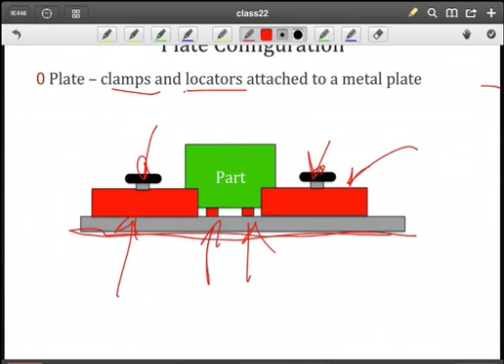First, there's the common plate configuration, where we have a supporting plate attached to a machine table, and we build up the fixture from that plate. We've got a set of clamps and locators. Here we see locators used to locate specific surfaces, and clamping devices that attach those to the plate as well as provide a clamping force. This is a quite common configuration because it's easily changed and reconfigured.

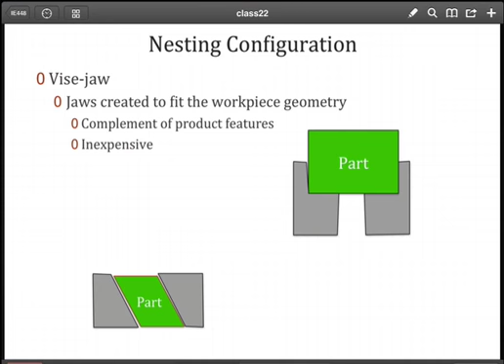Nesting configuration is also quite common, usually seen in the context of a vise jaw configuration. Here the jaws are created custom for the workpiece. We create the complement of the geometry we are nesting, and we don't have to enclose the entire geometry. So we have both locating surfaces as well as a clamping force applied in both cases, and it's fairly inexpensive, which is why it's quite popular and very flexible for creating new sets of jaws for different part geometries.

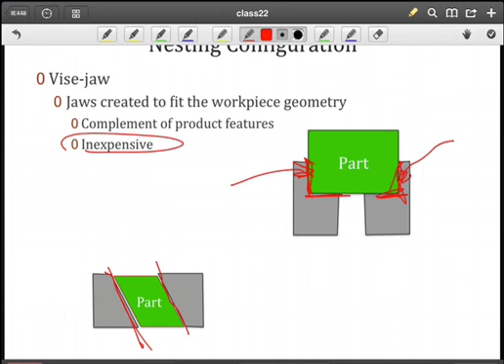If you've been in the lab for 448, you recognize the chick jaw configuration, where we have two positions and a different set of jaws in each position. Again, these are nesting configurations, and we can use both of them, placing parts in different stages in each location, ending up with the proper surfaces being located.

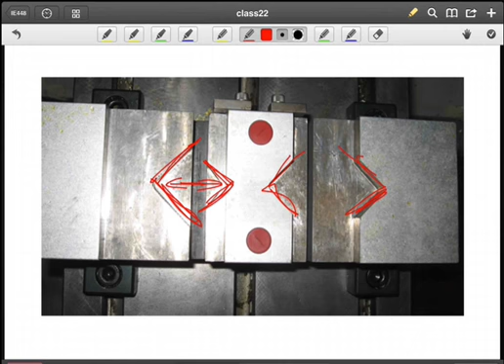If we look at that from the top, we see different possibilities for nesting. Here's the V-block we talked about last time, with different sizes and different depths. If we had a cylindrical feature, we could use the V's here to locate that axis. Don't forget about the process direction and the potential for deviation in terms of how far we are from that vertex. We also have locating surfaces here, here, and here.

Usually you have this two-position configuration when you want to have different widths to accommodate different sizes of parts and different nesting geometries that you need to enclose surfaces.

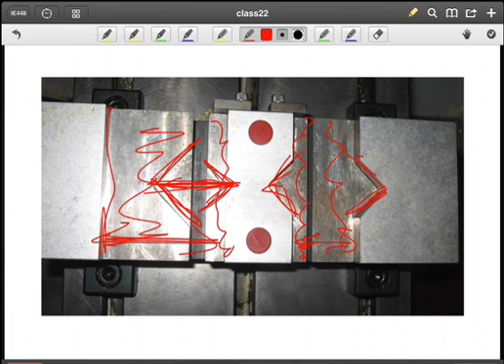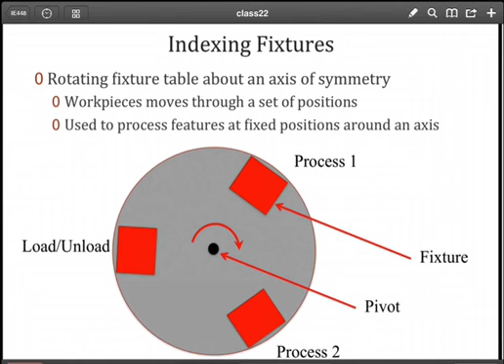An indexing fixture is quite common. Here we see three fixtures, all exactly alike, placed on an indexing table that rotates. I have a load-unload station where the part is placed in the fixture, so this is where my setup occurs. Then we rotate to the next position where a process is performed, and rotate again to the next position. So essentially we have a part on each of the fixtures going through the set of processes.

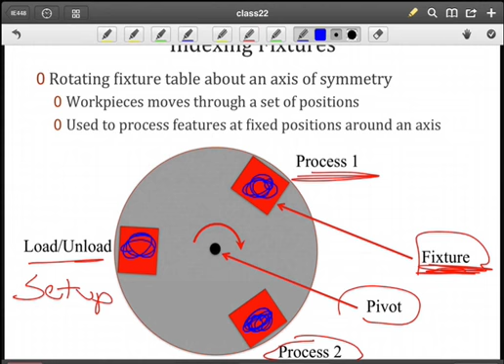Now you can see the advantage of this, and it has to do with cycle time. The lead time is not affected because the part still has to be set up, go through process 1, go through process 2, and then be removed from the fixture. So the total lead time to go through all these processes is still the same. The nice thing is we share a setup between process 1 and process 2, so we only have to set up once. This reduces the setup time, which is the goal: to minimize setup.

The cycle time will be affected by the bottleneck, the longest cycle time. So instead of performing process 1 and 2 together, we've split them, reducing the cycle time. The downside is it requires 3 fixtures, so the tooling cost has gone up. But we've seen improvements in cycle time and setup time, so there's a trade-off. The question is whether it's worth the trade-off.

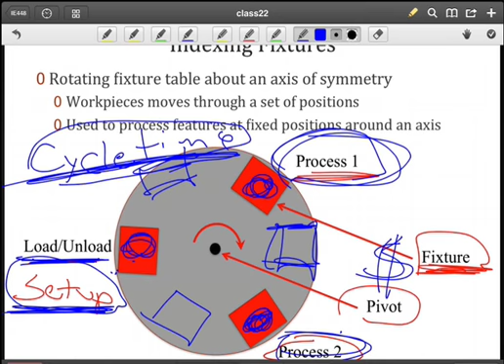Of course, you can have as many positions as physically possible on this indexing table, so if we wanted additional stations, we might have to increase the size of the indexing table. We can also use a multi-workpiece fixture configuration.

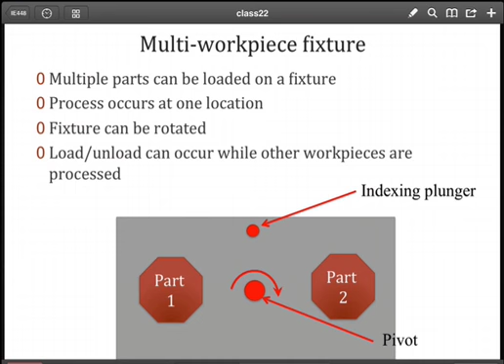At first glance it might look similar. The difference is that we're only going to have one process, and here we have two parts. We rotate a part into the process, and the cycle time occurs, so that one part location is essentially your setup and unload station, while the other location is where the actual process is taking place.

The indexing plunger is used to lock it in place, so we rotate it into the process, then rotate it out. What is the advantage of this type of fixture configuration? As you can see, we're doing the setup and unload at the same time that we're doing the process on that particular part, and therefore the impact is on cycle time.

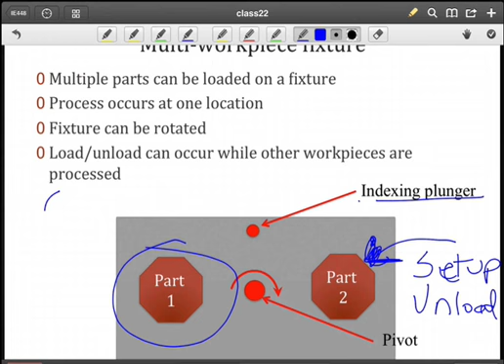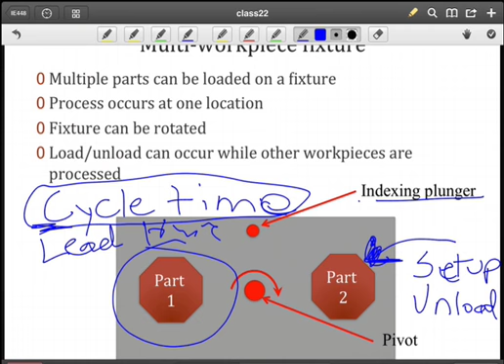Note that we haven't reduced setup time as in the previous configuration. We still have the same lead time to get through the process because we still have to go through the setup and unload as well as the process itself. So the advantage here is on cycle time. If you need to reduce your cycle time, this would be one alternative to consider.

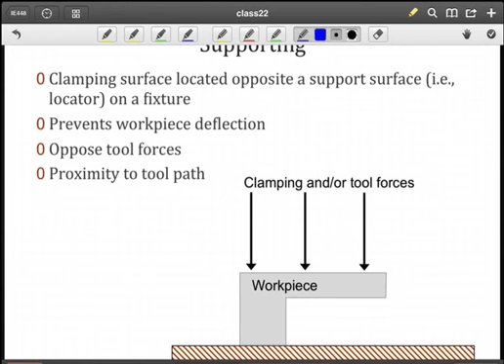When we think of a specific fixture configuration and the clamping forces or tooling forces involved, we have to consider supports. In any of these fixture configurations, if I've got a workpiece, for instance, this one is fairly obvious. If we apply a force out here, you're going to create a moment, and that workpiece is going to want to rotate about a point here and go into the plate.

So what we need here are supports that will prevent deflection of the workpiece, so that if forces are being applied in this region, we can still maintain the location and orientation of the workpiece with respect to the process. This includes both clamping and tool forces. So you have to think about your tool path - where's the tool going to travel, what types of forces are being applied, and where do we need to support the workpiece so that deflections do not occur.

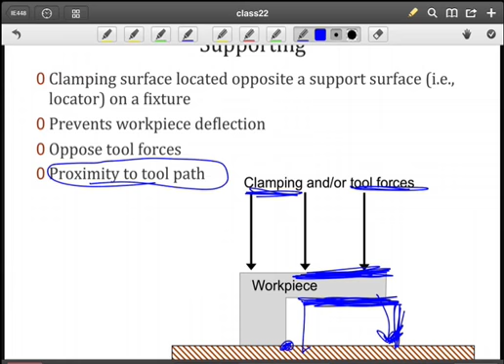When we go back to our datums and datum targets, if you recall, it's often the case that the datum targets are used to identify fixturing points, locating points, as well as tooling points. So we can use those points to actually design our fixtures, and it's particularly important when we're dealing with weldments, forgings, and castings, which often go through a secondary process in order to achieve the final geometry.

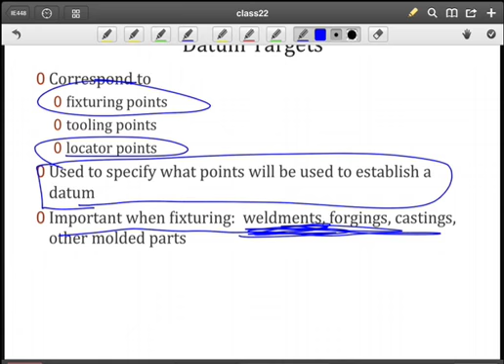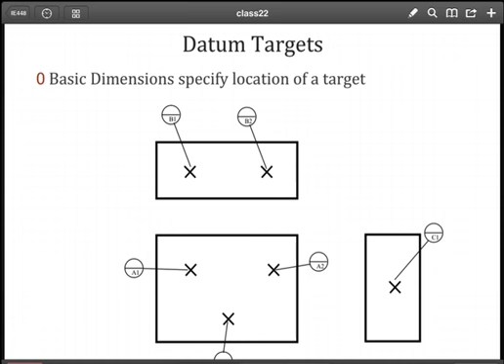So if you recall, we identified on the design spec specific locations. In this case, we have points on different surfaces of the part, and those are used to create our datum reference frame.

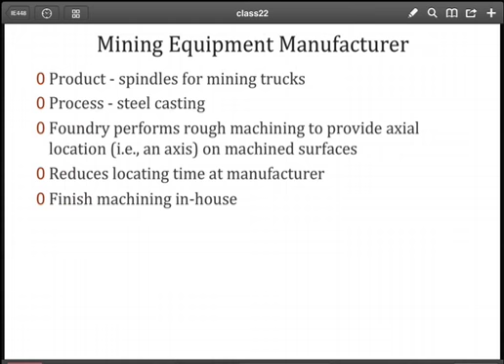Well, what does that look like on an actual part? Here we have an example of spindles that are created through a steel casting process for mining trucks. So we've got our wheel spindles, and the foundry, after producing the casting, is going to perform this rough machining operation, this secondary operation, to provide an axial location, essentially to be able to locate the axis on a machined surface. This helps to reduce locating time when it goes to the manufacturer that the foundry is supplying. And then there's some finishing machining that is performed in-house at the manufacturer.

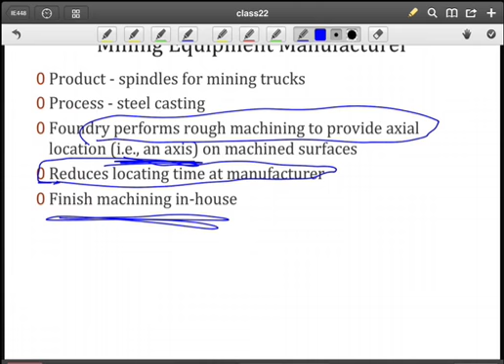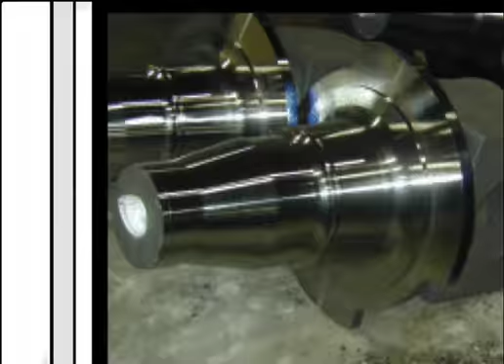Here's an example of what it looks like after the rough machining. You can note the axis that is trying to be created here. The axis is running down in this direction, and the entire casting has to be machined in order to provide that type of locating system.

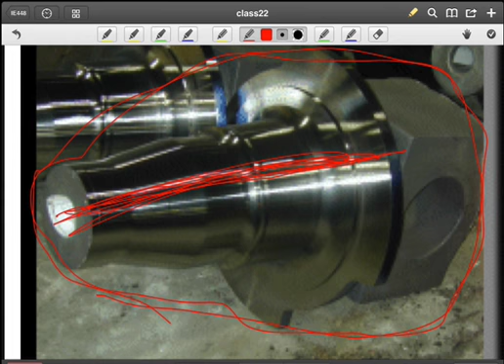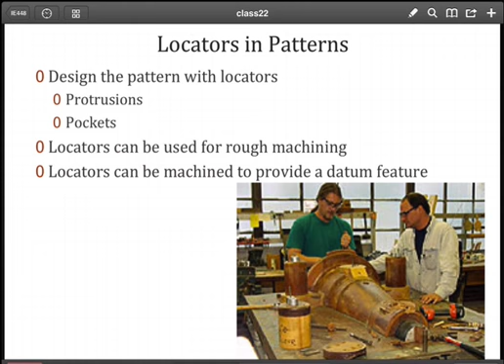When you look at locators, especially for castings, it's often the case that you can design the pattern, as you can see here, in a pattern shop that's being created to produce the mold. So here we have half of the mold, or the pattern used to create the mold. And in that we can add protrusions as well as pockets that are going to allow us to provide some type of location, because when our casting comes out of the mold, it will need to be located with respect to our machine in order to perform the rough machining.

We can also create locators actually on the surface by creating a datum feature with that rough machining.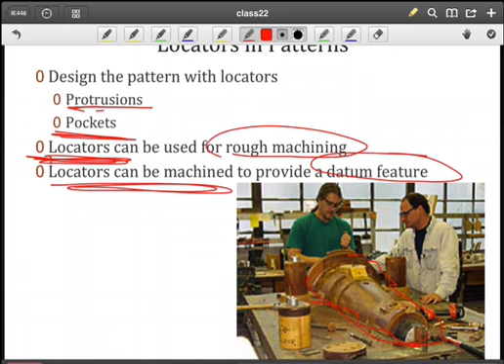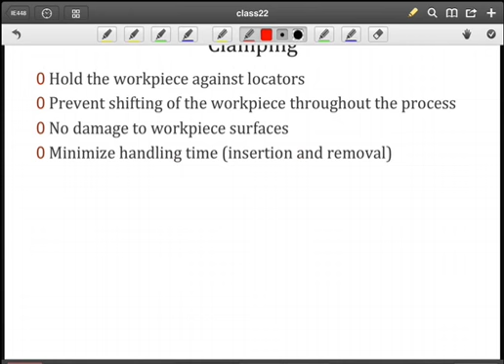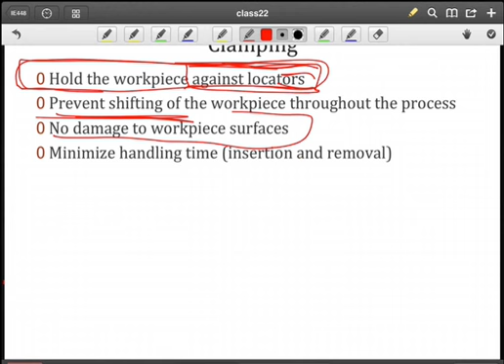The purpose of clamping is to hold the workpiece against the locators. That is the primary purpose. So when you think of clamping, we're not just concerned about keeping the workpiece from moving, but we're also concerned about it lifting or repositioning with respect to those locators. So we want to maintain the position and orientation with respect to these locators, prevent the shifting of the workpiece, and at the same time consider the material the workpiece is made from, because that's going to affect the amount of clamping force that can be applied.

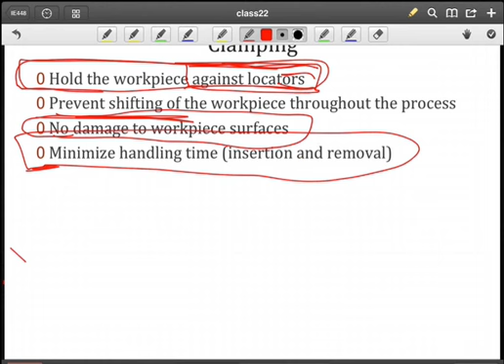At the same time, you need to minimize handling time for load and unload, because that's part of your setup and it's non-value adding. So if you have lots of clamps, it can increase the setup time significantly.

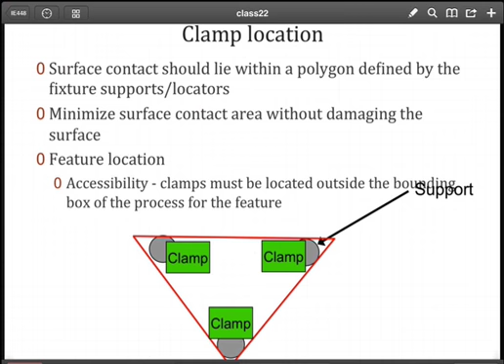When you add a clamp, you have to be concerned about its location. Think about the supports on your fixture—for instance, here we have locators, 3 locating pins. When thinking about clamping into the slide, we want to draw a polygon, the smallest polygon around our locators, and then place our clamps in that region. So it makes sense to put a clamp either in this location, or this location.

Now you may need multiple clamps depending upon what the forces are. But ideally, if you can get away with just one clamp, then you're going to decrease your setup time.

You want to minimize the surface contact area, and the reason for that is tool accessibility to the features you're trying to create. But at the same time, if you minimize surface contact area in order to increase the pressure, you're going to have to increase the force, and you have the potential for damaging the surface—by damaging, we mean plastic deformation.

Don't forget accessibility. You don't want to be placing clamps in the region where the process occurs.

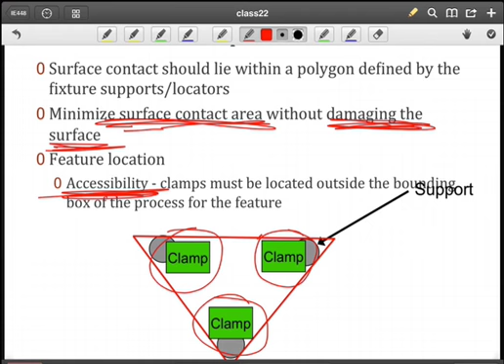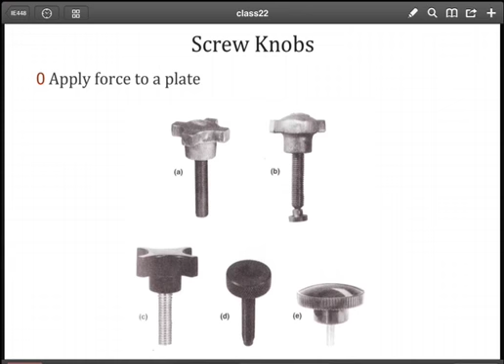These are typical knobs used in clamping, where we apply force to a plate, and in the process of applying that force, we are clamping against locators. Again, as you can see, these are threaded knobs, so there's going to have to be a corresponding threaded hole in order to get the clamping force.

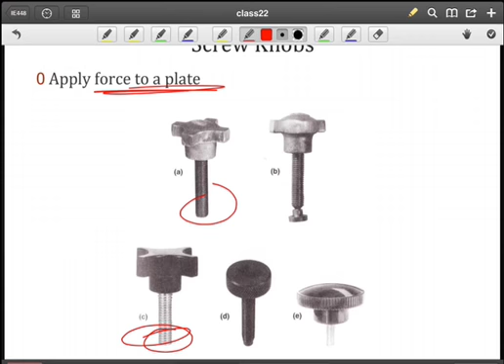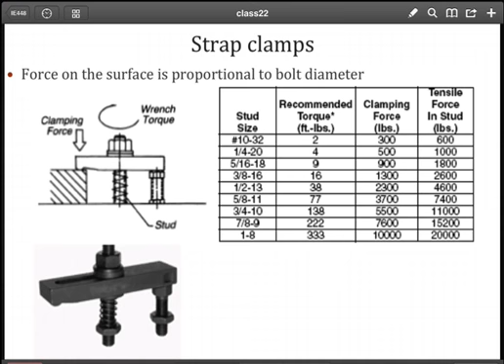A strap clamp is a very common configuration because it helps minimize the surface area that we're contacting, and it's based on the lever principle, as you can see. What we're going to do with a strap clamp is have a small surface region on the edge of the part, and at the nose of the strap we come in contact with the surface.

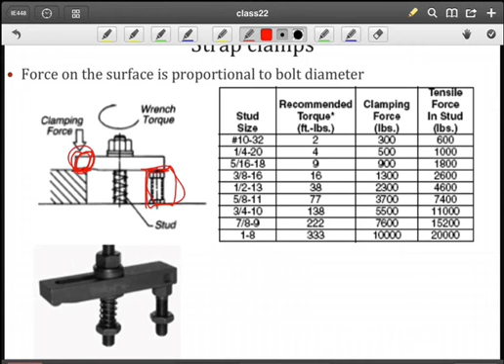Then we have a pivot here, which is essentially an offset from the plate, and we place our strap across that. We have a stud that's threaded into the plate, and a corresponding nut that we tighten on that stud. We tighten it using a torque wrench so that we can have a consistent clamping force based upon the torque and the size of the thread.

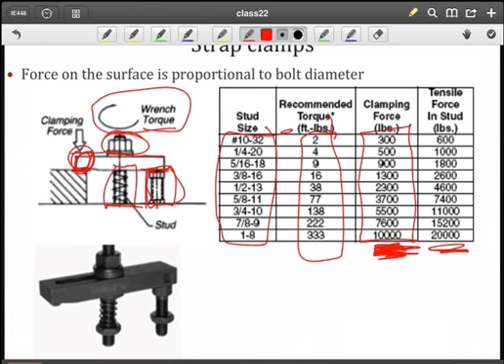We can adjust our clamping force, and these are just examples of the amount of clamping force that we can attain—as you can see, it can be quite significant. Again, here you would be concerned about deformation of your workpiece and potentially deformation of the stud itself, because that would affect your fixture.

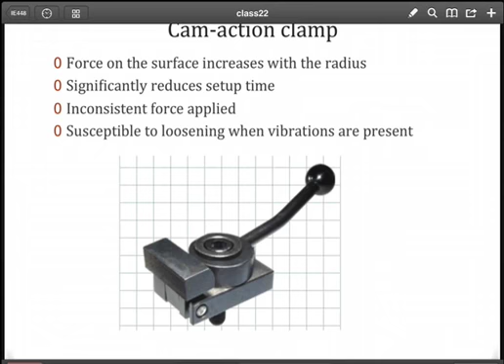A cam action clamp is very nice for quick setups. As you can see, the arm here can be rotated such that we can easily tighten and release our clamping surface. Again, you're clamping against locators.

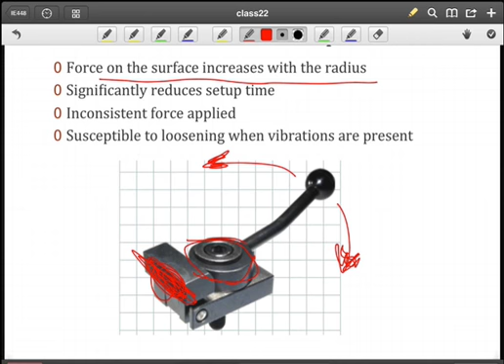The force on the surface will increase as this cam—and hopefully you've seen the geometry of a cam, it's essentially an oval egg shape—rotates so that the radius is constantly changing. As it gets larger with respect to this surface, we're moving further, and therefore our clamping force is going to increase.

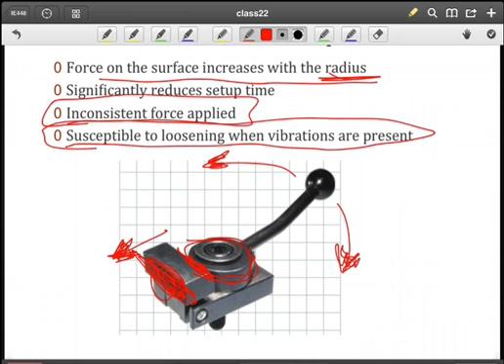The problem here is that you're going to get an inconsistent force applied by the operator. Each operator and each workpiece will see a slightly different force applied. It can also be susceptible to loosening if significant vibrations are present in the process. So again, you're faced with trade-offs between decreasing setup time and having a consistent force applied.

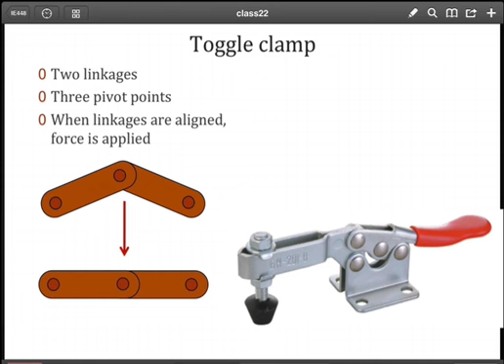Another common type of clamp configuration uses two linkages, with a pivot point, as you can see here. That pivot is going to lengthen the overall dimension, which provides the clamping force. When the linkages are aligned, the force is applied. The direction, of course, changes depending upon the actual configuration, and there are many different configurations for these toggle clamps.

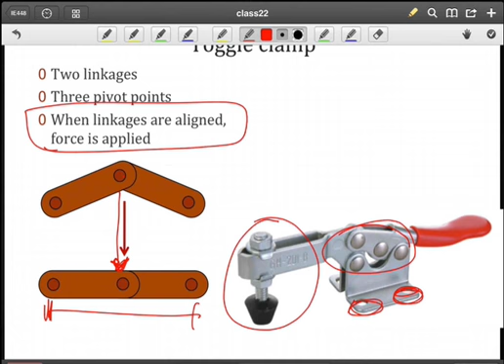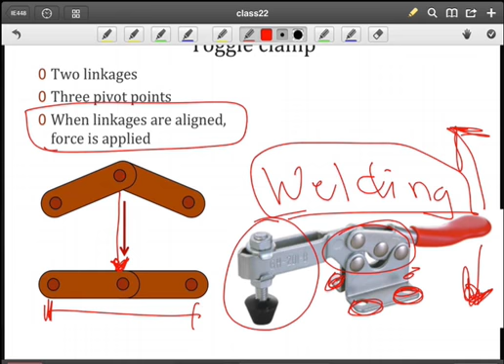We would attach our clamp to our fixture and then apply force to the lever to get the toggling effect. As you can see with a toggle clamp, typically they are low force applications. You'll find these quite often used in welding, where we have weldments—we could have a lot of toggle clamps trying to hold our workpiece up against locators.

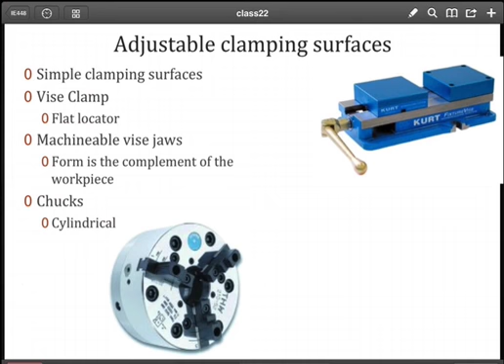And then we have our adjustable clamping surfaces that we talked about for the nesting configurations. Here we're going to have a vise clamp with flat locators or V-blocks machined into those surfaces. And with the nesting configuration, we can create custom surfaces that we're clamping against. And all we do here is essentially rotate until we come in contact with our surface and hold it against our locating surface. Note that the only force in this direction, normal to the axis here, is a frictional force.

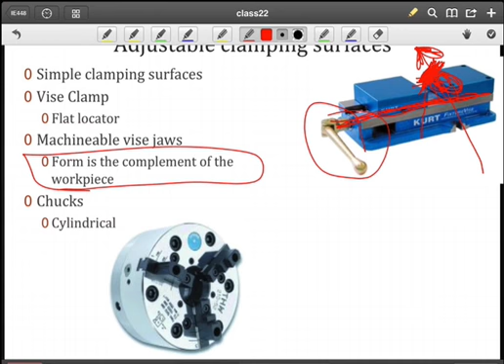And if you recall from a frictional force, that is not the best way to overcome a tooling force. Also note, your workpiece can pop up because, again, in this direction, in the Z direction, we also just have a frictional force. So there is a downside of using this type of an approach.

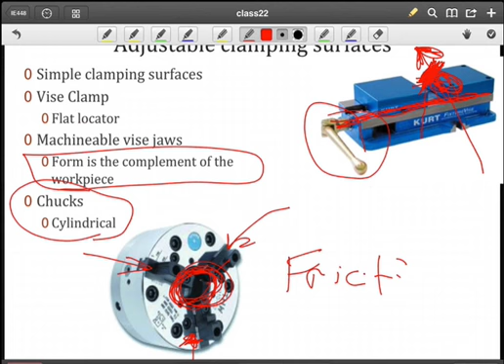Well, with the turning center, you're going to see chucks used. Here we have an adjustable chuck so that we can place our bar stock in center here and then tighten up against those surfaces. Note, unless you put notches into your workpiece, again, you're dealing with frictional forces as this chuck is rotating in our turning center. We're trying to prevent slippage of the bar stock or the workpiece inside of the chuck based upon frictional forces, unless you create actual tooling points in there that we could tighten up the chuck against and then not rely just on frictional forces.

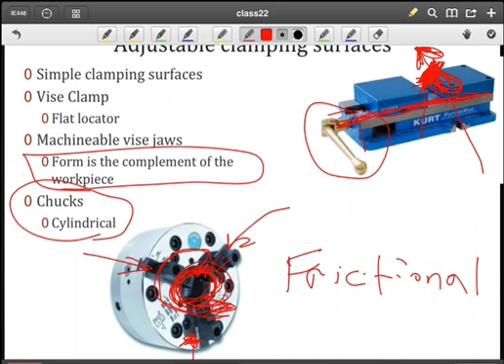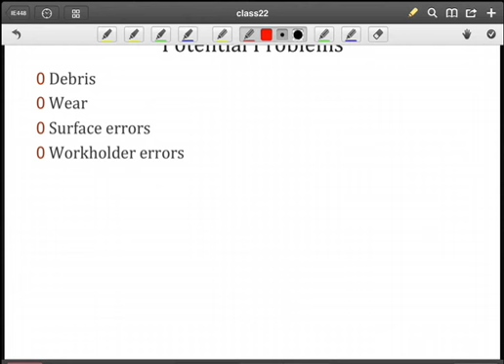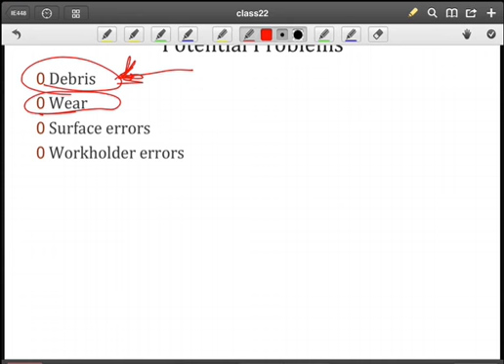What kinds of problems can occur in fixturing? Well, you can have debris that builds up over time, especially if we're dealing with material removal processes. So we can have chips and all kinds of material build up in different parts of our fixture, and they may not be noticed. Therefore, we need to keep our fixtures clean after every operation. Over time, our fixtures will wear as we would expect, and therefore we have to qualify our fixtures to make sure that the locating surfaces have not changed significantly.

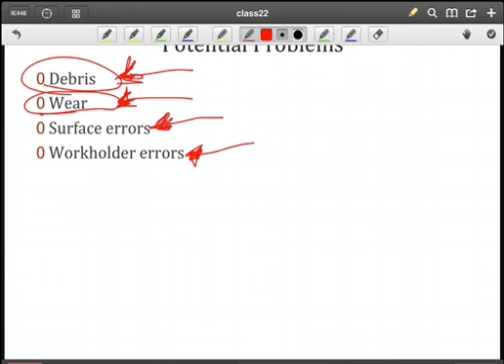Well, we have surface errors, of course, that are going to contribute to our process capability, and we have workholder errors when setup occurs. So when we place the workpiece in the fixture, each time it will be a unique position. Even though we have our locators, the operator will not be able to consistently locate the workpiece. So again, this is going to contribute to our process capability as well.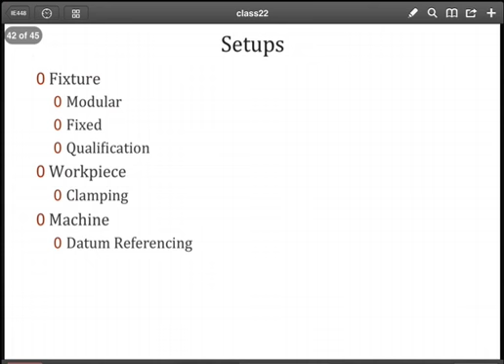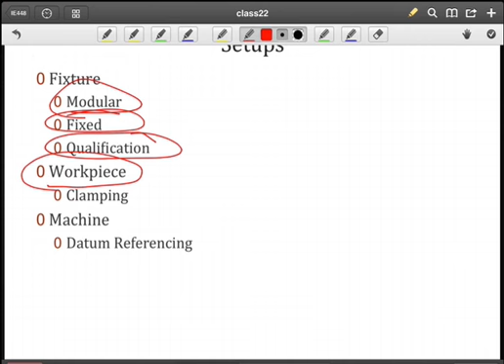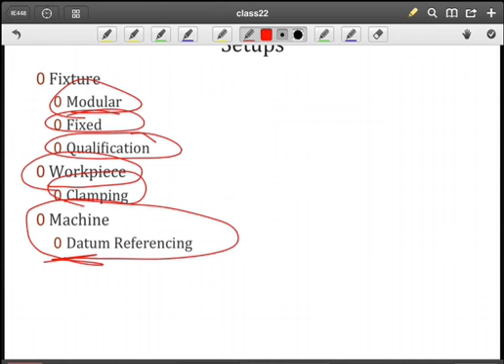Your setups for the fixture itself, it could be a modular fixture that we have to build up. It could be a fixed fixture. And then it may require qualification to make sure that the fixture is still locating and orienting our workpiece surfaces correctly. Then we have to set up the workpiece in the fixture, and that will involve clamping against our locators. And then finally, when we place it on the machine table, we're going to have to consider datum referencing in terms of touching off on different points so that we can set up the machine so it knows where our coordinate systems are, as we saw with CNC programming.

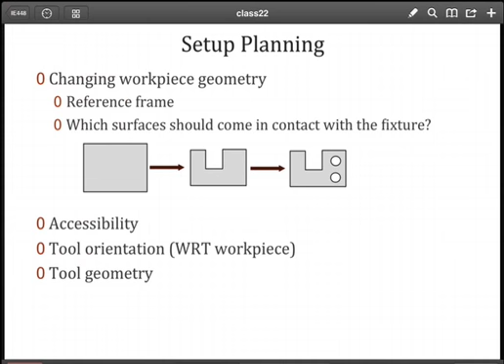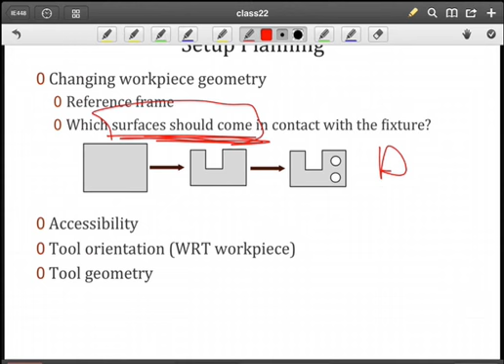The other consideration that you have to take into account is the fact that your workpiece geometry is evolving over time. And so as it evolves, different surfaces become available for locating and clamping. So you want to understand at the various stages in your process which surfaces should come in contact with the fixture. Again, we go back to our datums, and we would prefer to use those if they are available. If they aren't available, we need to create those before the features, or at the same time, in the same setup, before the features that are referencing those datums are created.

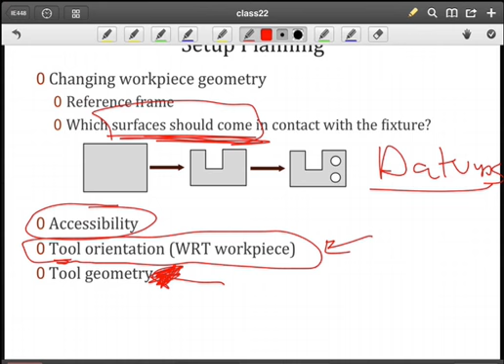Don't forget, in order to accommodate this change in geometry, we're going to have to consider accessibility of the tool during that process. Also, what are the possible tool orientations based upon your machine configuration? Is it a 3-axis vertical mill? Is it a 5-axis? That will affect your ability to orient the tool. And then finally, the tool geometry can affect your fixture design because you have to accommodate different tools in the carousel that may be used during that process.

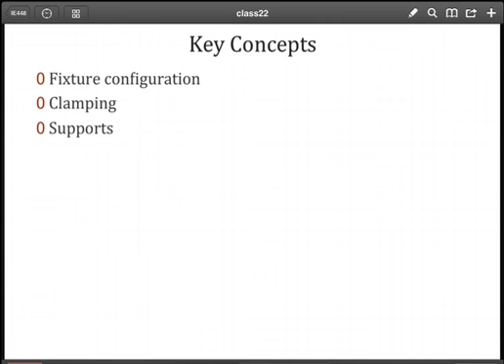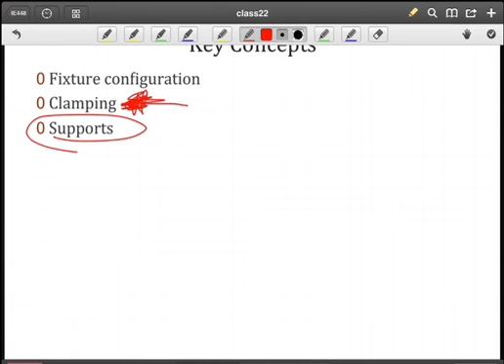So, select a fixture configuration that is going to be suitable. Again, there are trade-offs involved, as we've already seen. So if your concern is setup time, reduction in setup time, you may go with a different fixture configuration than if your concern is primarily the tooling cost. And then select clamping that will provide the necessary force to keep your workpiece up against the locators. And finally, don't forget supports. We need to be supporting areas that can be deflected so that we don't lose the repeatability of our orientation and positioning.

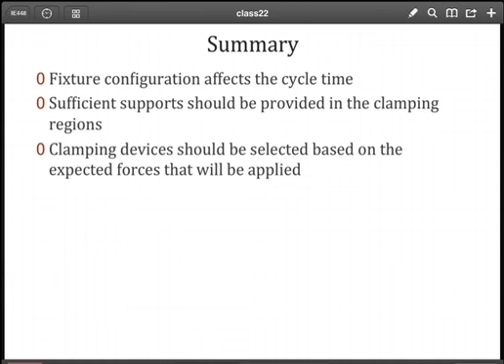Fixture configuration, as you saw in the examples, will affect the cycle time. And sufficient supports need to be provided in your clamping region. So wherever you're applying those forces against your locators, make sure that it's well supported. Your clamping devices that you're going to use, you have to plan for the expected forces that could be applied to the workpiece from a tooling perspective.